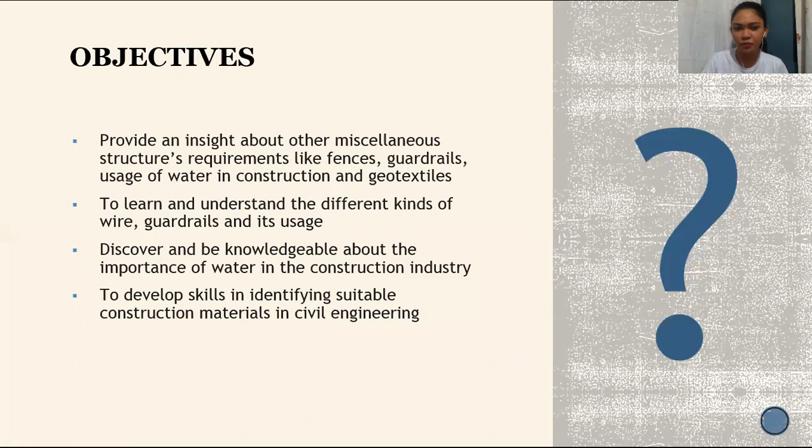Objectives: to provide an insight about other miscellaneous structures requirements like fences, guardrails, usage of water in construction, and geotextiles; to learn and understand the different kinds of guardrails and its usage; to discover and be knowledgeable about the construction and the importance of water; and to develop skills in identifying suitable construction materials in engineering.

So let's start with item 711, the fence and guardrail. By definition, a fence is a structure that encloses an area, typically outdoors, and is usually constructed from posts connected by boards, wire, rails, or netting. On the other hand, a guardrail is a railing guarding against danger, especially a barrier placed at the edge of a highway at a dangerous point. So it is usually seen on highways or roads.

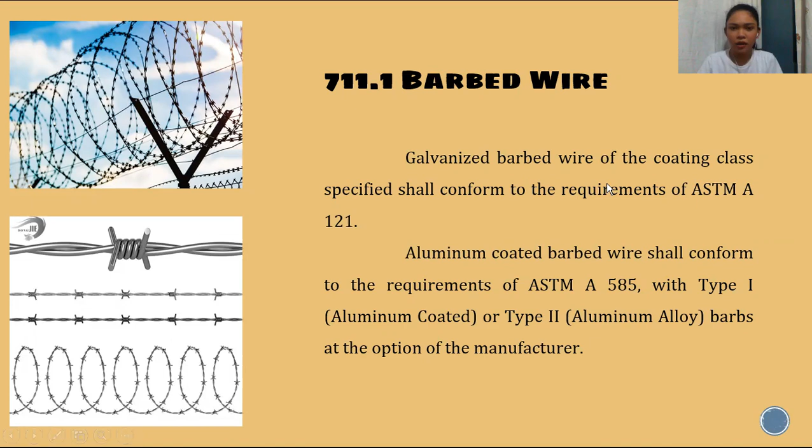Item 711.1, the barbed wire. Galvanized barbed wire of the coating class specified shall conform to the requirements of ASTM-A 121. Aluminum-coated barbed wire shall conform to the requirements of ASTM-A 585 with Type 1 aluminum-coated or Type 2 aluminum alloy barbs, at the option of the manufacturers. So under this item, it shall conform to the requirements of ASTM, the American Society for Testing and Materials. On the picture, that is an example of a barbed wire.

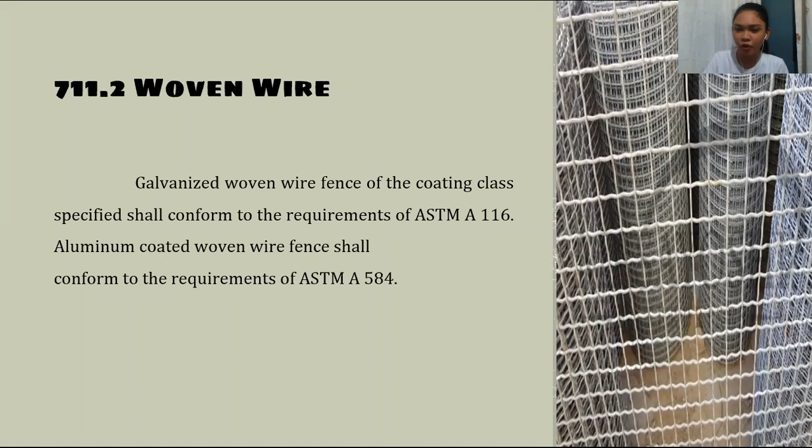Item 711.2, the woven wire. Galvanized woven wire fence of a coating class specified shall conform to the requirements of ASTM-A 116. Aluminum-coated woven wire fence shall conform to the requirements of ASTM-A 584. On the right side of the slide, that is the woven wire.

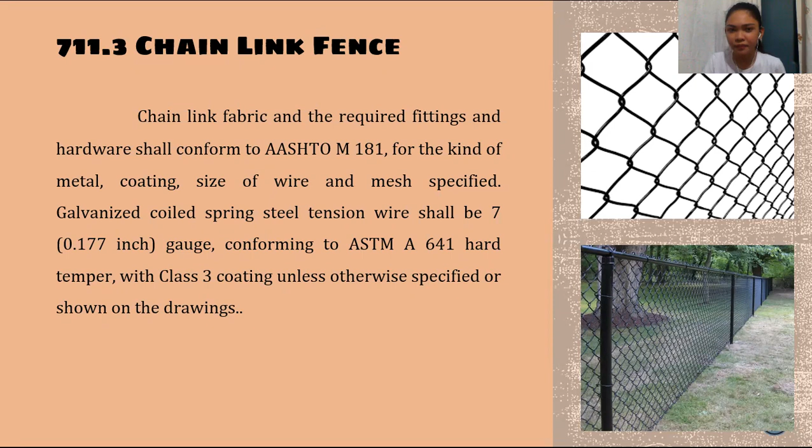Now the chain link fence. Chain link fabric and the required fittings and hardware shall conform to AASHTO M181 for the kind of metal, coating, size of wire, and mesh specified. Galvanized coil spring steel tension wire shall be 7 or 0.177-inch gauge conforming to ASTM A641 hard temper with class 3 coating unless otherwise specified or shown in the drawings. Aluminized coil spring tension wire shall also be 7 or 0.177-inch gauge hard temper having a minimum coating mass of 0.12 kg per meter squared or 0.40 ounce per foot squared of aluminum.

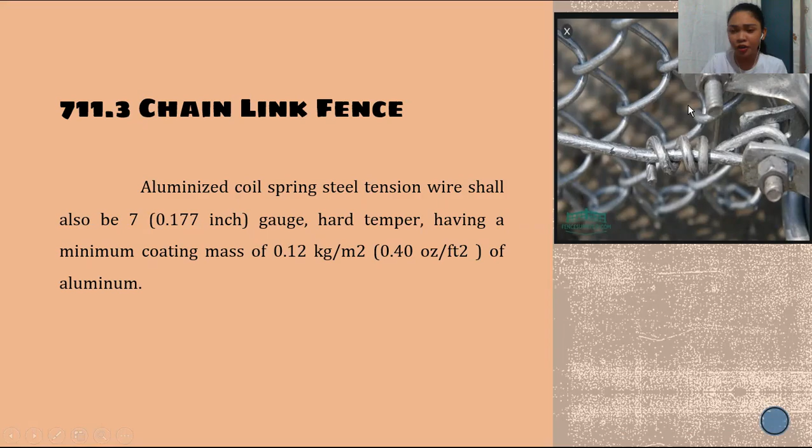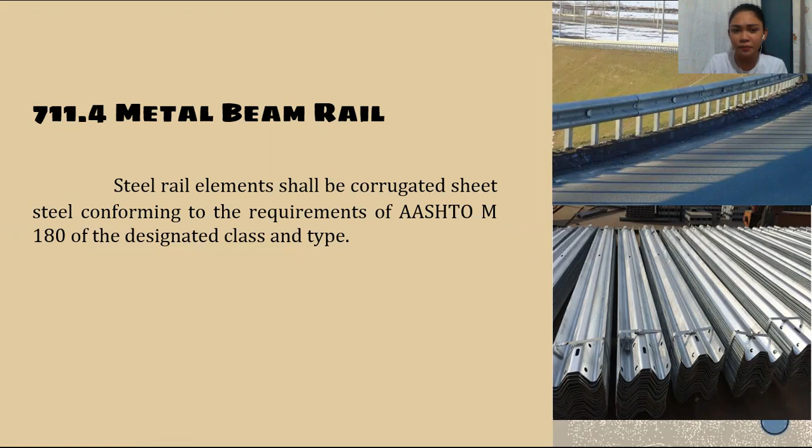So the aluminized coil spring steel tension wire, as shown in the picture, is what locks or holds the wires. Next, the metal beam rail: steel rail elements shall be corrugated steel sheet conforming to the requirements of AASHTO M 180 of the designated class and type. This metal beam rail is also shown on the slide; it is a corrugated sheet.

And the timber rails. Timber rails are rails made of timber. The timber rail shall be cut from the specified grade of dry, well-seasoned, dressed timber stock of the species specified, which shall meet the applicable requirements of AASHTO M168.

Where preservative treatment is specified, these shall conform to the requirements in Section 713.3. Rustic rails shall be straight, sound, and free of injurious defect, and shall have been cut from live trees not less than 30 days but not more than 1 year before use. They shall have been stripped of bark before seasoning or shall have been stored underwater. So the timber that would be used will be treated; treated and untreated timber will be discussed later on.

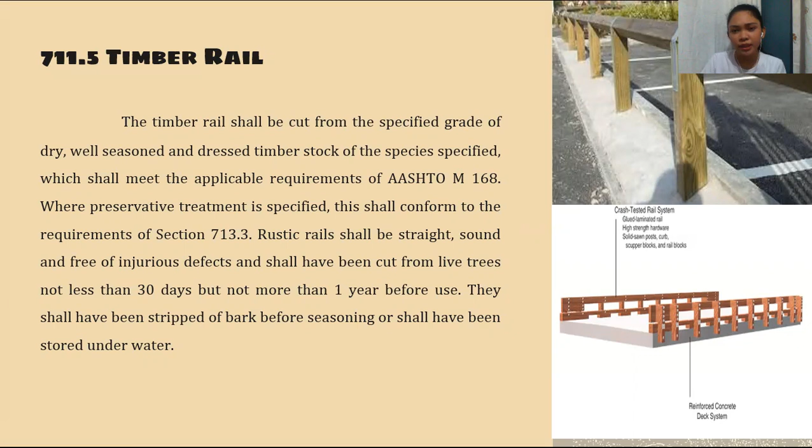Immediately before the logs are used in the work, all knots and projections shall be trimmed smooth, and if water cured, all bark shall be peeled. Slight curvature of wind to give a pleasing appearance to the structure will be permitted. Logs of only one species shall be used in the construction of any one continuous length of guardrail, meaning only one kind of timber is used in one continuous guardrail. In the picture, there's an example of a guardrail on a concrete post or concrete blocks.

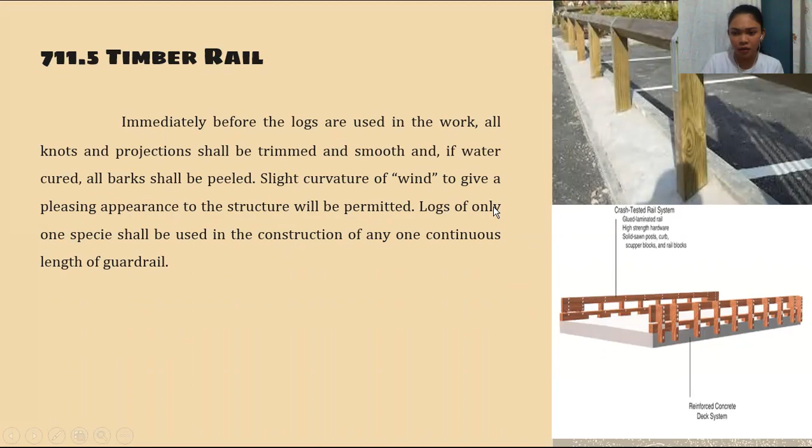Now the fence post. Wood posts shall conform to the details and dimensions indicated in the plans. All wood posts shall be sound, seasoned wood, peeled, and cut square as indicated. The posts shall be straight and all knots trimmed flush with the surface where treated posts are called for. The kind and type of treatment shall conform to that indicated in the plans. When red cedar posts or bracing is furnished, the requirements for peeling may be omitted.

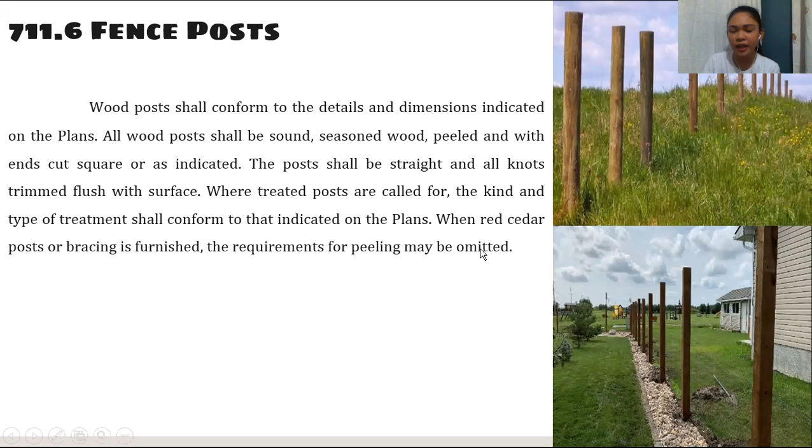There are many kinds of posts, the circular ones and the rectangular ones, so whatever is specified in your plan, that is what should be followed. It should be treated and fully furnished. All dimensions, timber, and lumber required for fences or gates shall be sound, straight, and reasonably free from knots, splits, and shakes.

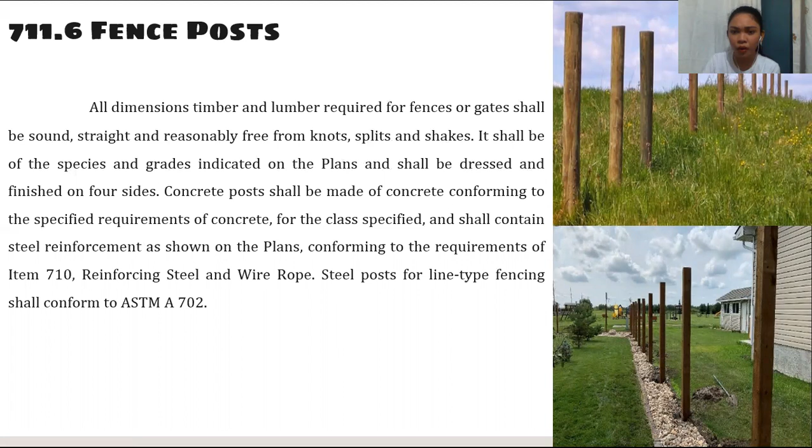It shall be of the species and grades indicated in the plans, and shall be dressed and finished on four sides. Concrete posts shall be made of concrete conforming to the specified requirements for the class specified, and shall contain steel reinforcement as shown in the plans, conforming to item 710, reinforcing steel and wire rope. Steel posts for line-type fencing shall conform to ASTM A702. Concrete posts are also commonly used nowadays because they are much more durable and can withstand any weather, and shall be according to the plans of the engineers.

Steel posts shall be galvanized in accordance with AASHTO M111, except tubular steel posts which shall be galvanized in accordance with ASTM A120. Fittings, hardware, and other appurtenances not specifically covered by the plans and specifications shall be galvanized in accordance with ASTM A120 and shall be standard commercial grade in accordance with current standard practice. Weathering steel posts conforming to the requirements of ASTM A558 shall be furnished when specified. Aluminum alloy posts shall conform to the requirements of AASHTO M181.

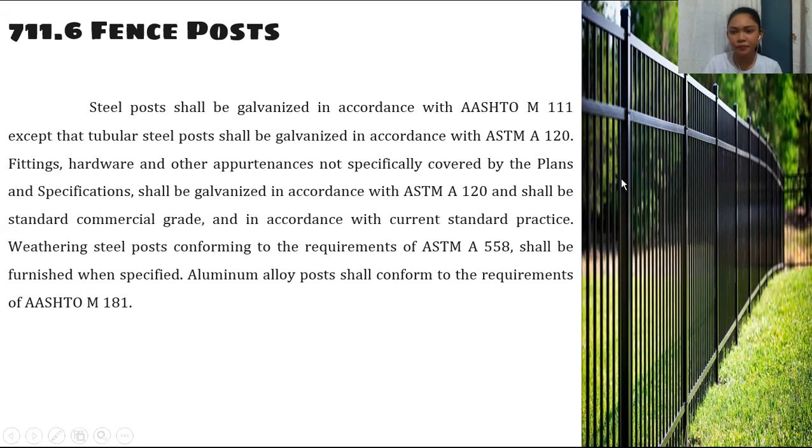Then the guardrail posts - these are the ones used to hang the guardrails, as shown on the right side of the slide. Guardrail posts shall conform to the applicable standards contained in AASHTO, AGC, ARTBA, or a Guide to Standardized Highway Barrier Rail Hardware. There are different kinds of guardrail posts, depending on what is specified in the plan - it can either be timber or steel.

Then the guardrail hardware. Guardrail hardware shall conform to the applicable standards contained in AASHTO, AGC, ARTBA, or the Guide to Standardized Highway Barrier Rail Hardware. So the hardware refers to items like the screws used to attach the guardrail post to the guardrail itself.

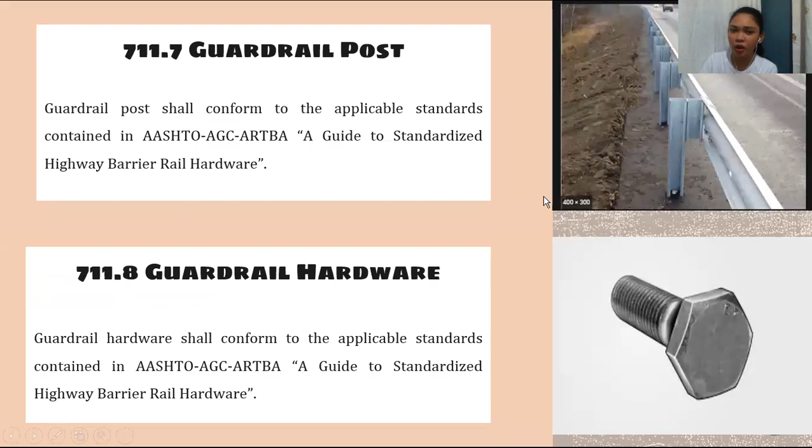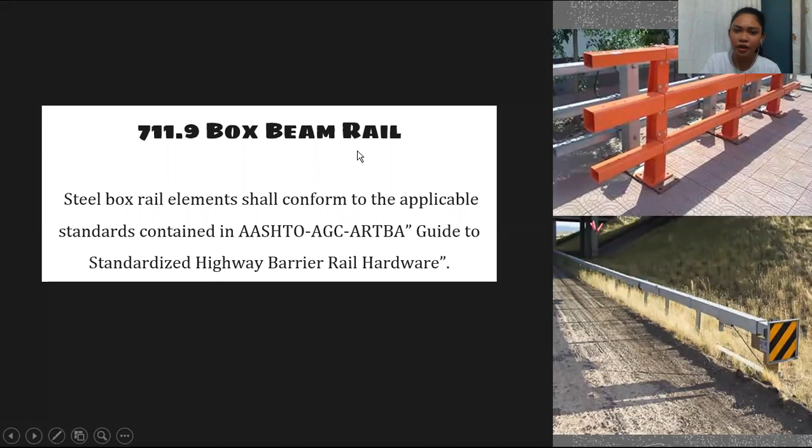Then item 711.9, the box beam rail. There is also a box beam rail that is used, different from the usual one seen in past slides which was just flat. This one is boxed. Steel box rail elements shall conform to the applicable standards contained in AASHTO, AGC, ARTBA, or the Guide to Standardized Highway Barrier Rail Hardware.

Next is item 712, structural metal. Structural steel is very common in the construction industry nowadays because of its advantages in construction. Steel shall be furnished according to the following specifications unless otherwise specified. Structural carbon rivet steel shall be furnished - all structural steel used must be furnished according to what is specified in the plan by the engineer.

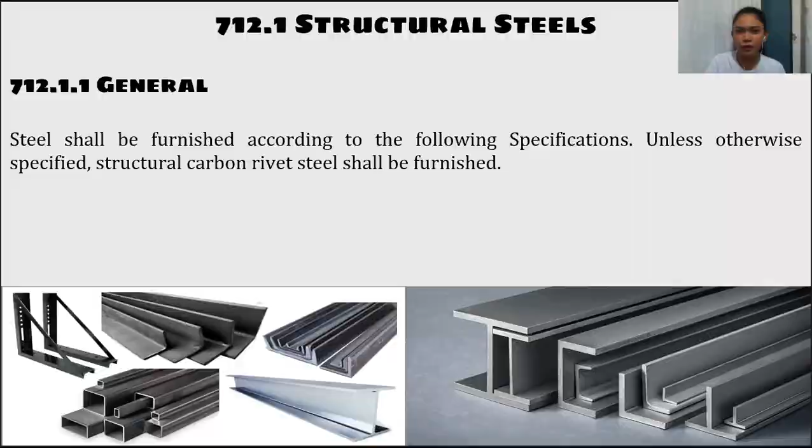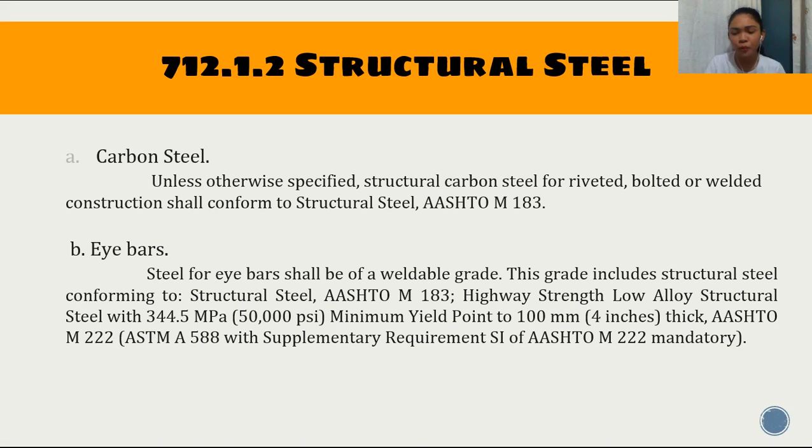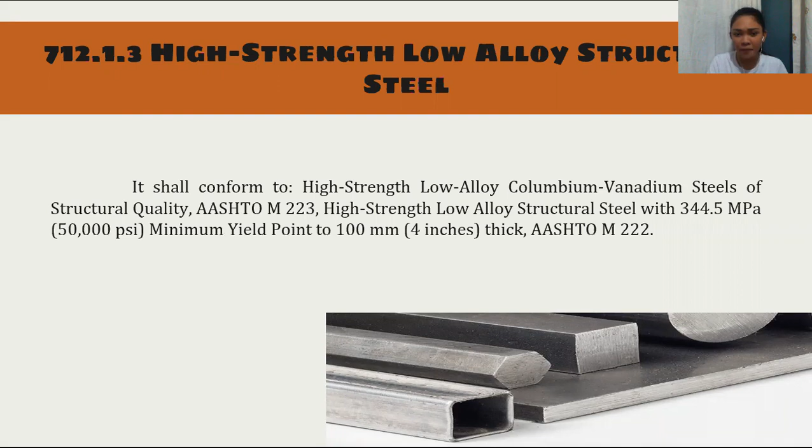Item 712.1.3, high-strength low-alloy structural steel. It shall conform to high-strength low-alloy columbium vanadium steels of structural quality, AASHTO M223, high-strength low-alloy structural steel with 344.5 MPa or 50,000 psi minimum yield point up to 100 mm or 4 inches thick, and AASHTO M222.

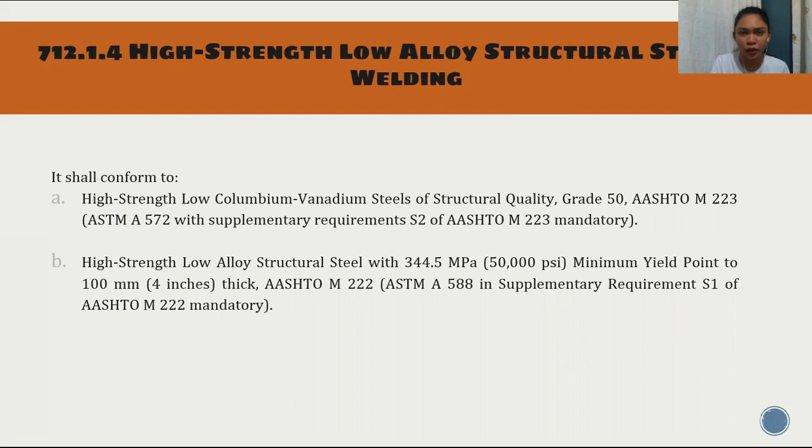Next is high-strength low-alloy structural steel for welding. It shall also conform to high-strength low-columbium vanadium steels of structural grade 50, AASHTO M223, and high-strength low-alloy structural steel with 344.5 MPa minimum yield point up to 100 mm thick, AASHTO M222, which is mandatory.

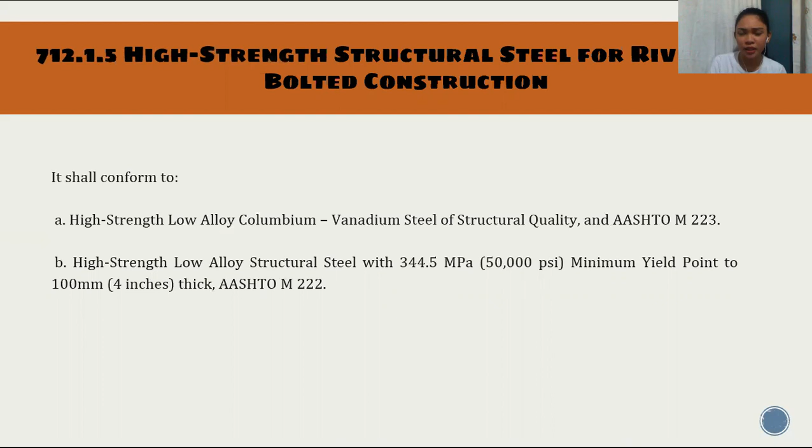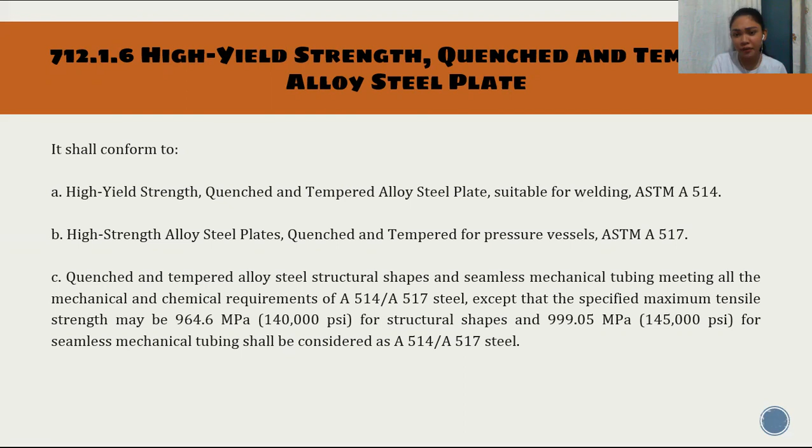Then high-yield strength quenched and tempered alloy steel plate. It shall conform to high-yield strength quenched and tempered alloy steel plate suitable for welding, high-strength alloy steel plates quenched and tempered for pressure vessels, and quenched and tempered alloy steel structural shapes and mechanical tubing meeting all mechanical and chemical requirements of A514/A517 steel, except that the specified maximum tensile strength will be 964.6 MPa for structural shapes and 999.05 MPa for seamless mechanical tubing.

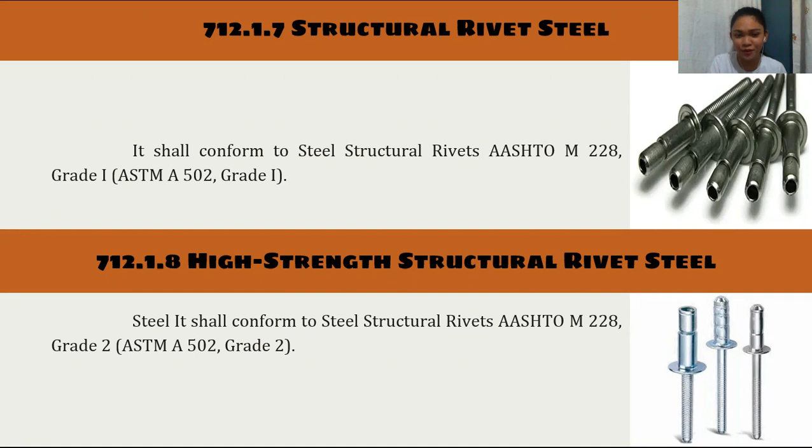Then structural rivet steel, as shown in the picture, shall conform to steel structural rivets AASHTO M228 and grade 1, ASTM A502 grade 1. High-strength structural rivet steel shall conform to steel structural rivets AASHTO M228 and grade 2.

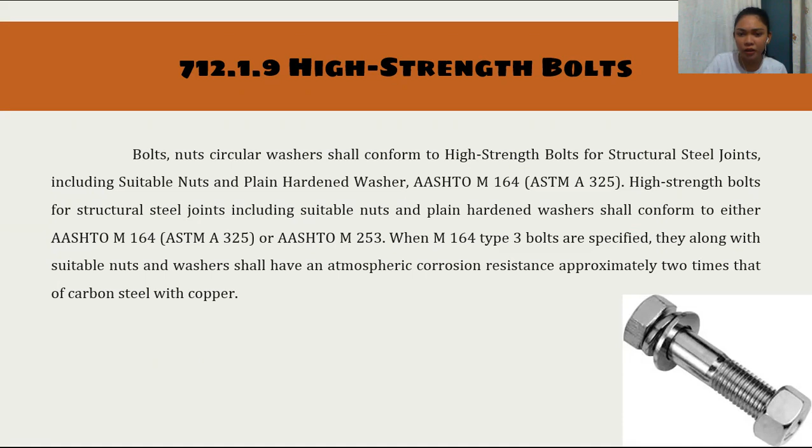AASHTO M164 high-strength bolts for structural steel joints, including suitable nuts and plain hardened washers, shall conform to either AASHTO M164 or AASHTO M253. When M164 Type 3 bolts are specified, they, along with suitable nuts and washers, shall have an atmospheric corrosion resistance approximately 2 times that of carbon steel with copper.

Bolts and nuts manufactured to AASHTO M164 are identified by proper marking as specified on the top of the bolt heads and on the face of the nuts for 3 different types. Bolts manufactured to AASHTO M253 shall be identified by marking on the top of the head with the symbol A490, and the nut shall be marked on the face with the legend 2H or DH.

Bolt and nut dimensions shall conform to the dimensions shown in the table, as I will show later, and to the requirements for heavy hexagon structural bolts and for heavy semi-finished hexagon nuts given in ANSI standard B18.2.1 and B18.2.2 respectively. So these are the specifications here.

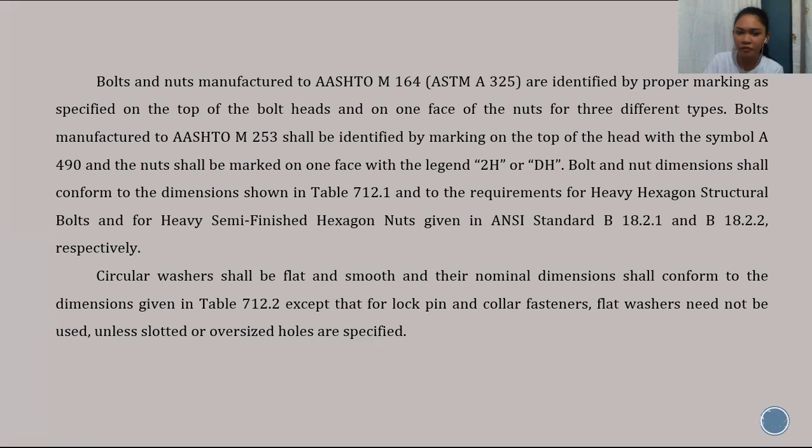The circular washers shall be flat and smooth, and their nominal dimension shall conform to the dimensions given in Table 712.2, except that for lock pin and collar fasteners, flat washers need not be used unless slotted or oversized holes are specified. Beveled washers for American Standard beams and channels or other sloping faces shall be required and shall be square or rectangular in shape.

They shall be tapered in thickness and shall conform to the dimensions given in the table. When necessary, the washer may be clipped on one side to a point not closer than 0.875 or 7/8 of the bolt diameter from the center of the washer.

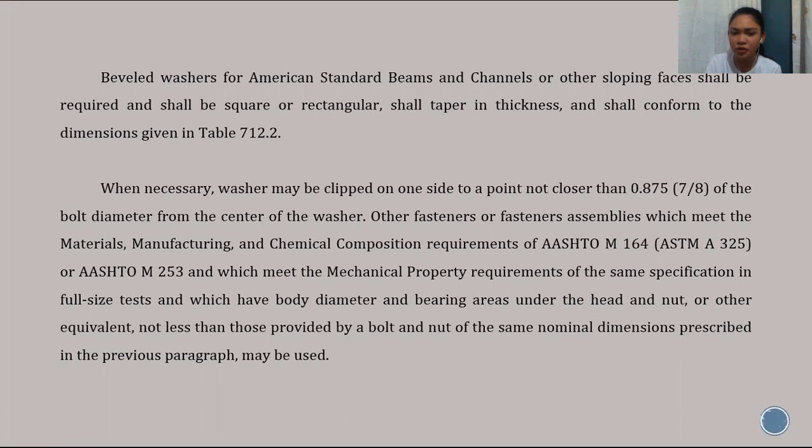Other fastener assemblies which meet the manufacturing materials and chemical composition requirements of AASHTO M164 or M253, and which meet the mechanical property requirements of the same specifications in full-size tests, which have body diameter and bearing areas under the head and nut or other equivalent not less than those provided by a bolt and nut of the same nominal dimensions prescribed in the previous paragraph, may be used.

Subject to the approval of the engineer, high-strength steel lock pin and collar fasteners may be used as an alternate for high-strength bolts or rivets as shown in the plans.

The shank and head of the high-strength steel lock pin and collar fasteners shall meet the requirements of the preceding paragraph. Each fastener shall provide a solid shank body of sufficient diameter to provide tensile and shear strength equivalent to or greater than the bolt or rivet specified, and shall have a cold forged head on one end, of type and dimensions as approved by the engineer.

A shank length suitable for material thickness, fastening locking groove, breakneck groove, and pull grooves are all annular grooves on the opposite end. So as specified on the plans, you follow and base it on AASHTO M253 or AASHTO M164.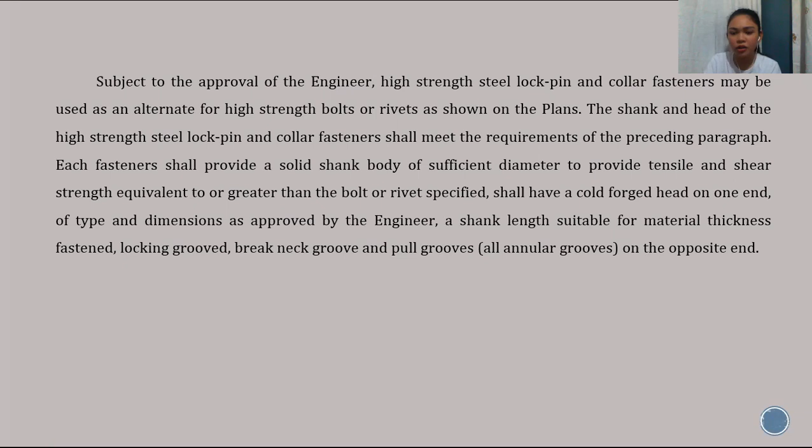Lastly, each fastener shall provide a steel locking collar of proper size for the shank diameter used, which by means of suitable installation tools is cold swaged into the locking grooves, forming a head for the groove end of the fastener after the pulling groove section has been removed.

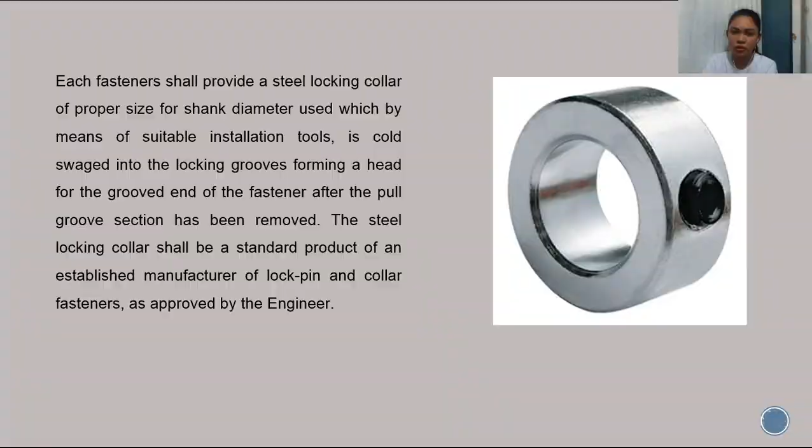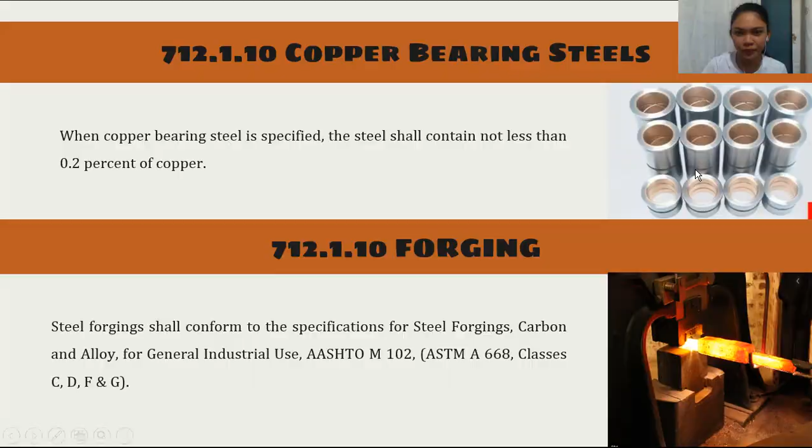Item 712.3, pins and rollers. Pins and rollers more than 228.6 mm or 9 inches in diameter shall be annealed carbon steel forgings conforming to AASHTO M102 Class C1.

Pins and rollers 228.6 mm or 9 inches or less in diameter shall be annealed carbon steel forgings conforming to AASHTO M102 Class C1, or cold finished carbon steel shafting conforming to AASHTO M169, grade 1016 to 1030 inclusive, with a minimum Rockwell scale B hardness of 85.

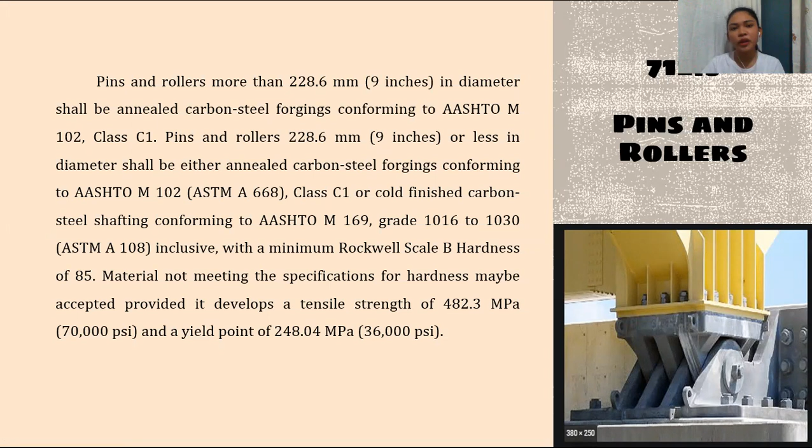Material not meeting the specification for hardness may be accepted provided it develops a tensile strength of 482.3 MPa or 70,000 psi and a yield point of 248.04 MPa. So material that doesn't pass the hardness specification stated in AASHTO M169 may be accepted provided its tensile strength reaches 70,000 psi and its yield point reaches 36,000 psi.

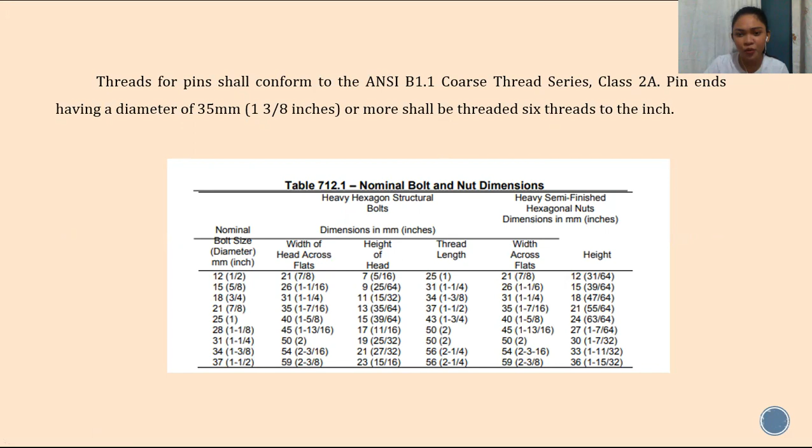This is Table 712.1 for nominal bolt and nut dimensions, which I already discussed or rather read earlier. The bolt size is specified in mm or inches, along with the width across flats, the height of the head, the thread length, and the width across flats or height.

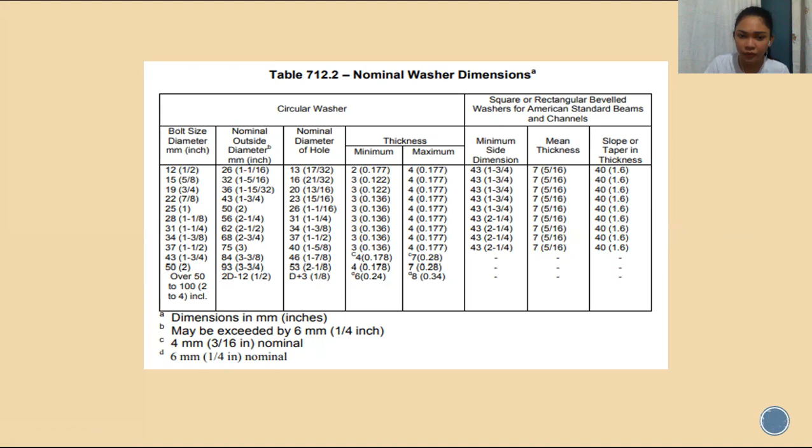The casting shall conform to the requirements of the following specifications: steel castings for highway bridges, AASHTO M192 Class 70, shall be furnished unless otherwise specified, and chromium alloy steel casting, AASHTO M163 grade CA15, shall be furnished unless otherwise specified. This is specified in the plans, so you just follow the plans.

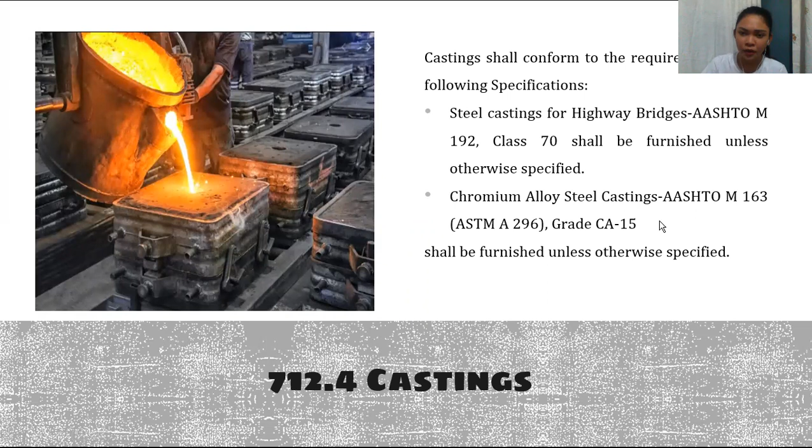Then gray iron casting, AASHTO M105 class number 30, shall be furnished unless otherwise specified. Iron castings shall be true to pattern in form and dimensions, free from pouring faults, sponginess, cracks, blow holes, and other defects affecting strength and value for the service intended. Castings shall be boldly filleted at angles and the arrises shall be sharp and perfect. So your casting should follow the dimensions, be free from folds, sponginess, cracks, holes, or other defects.

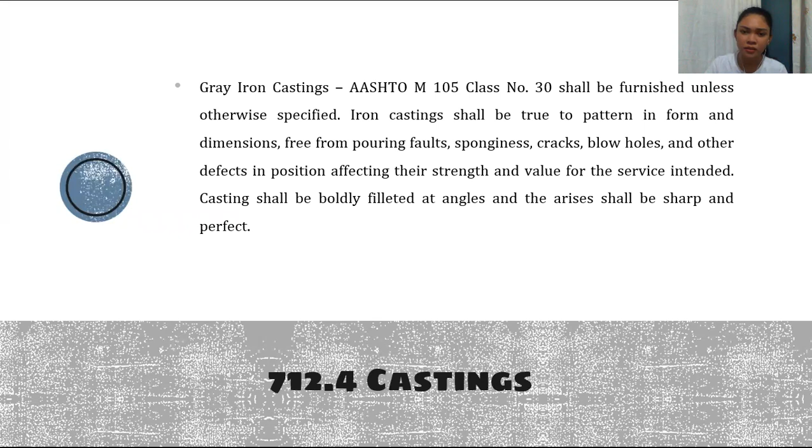For item 712.5, steel grid floors. Here's an example of steel grid floors. All steel grid floors shall conform to the requirements of AASHTO M183 or AASHTO M222. Steel grid floors can be weathering steel, galvanized, or painted. Unless the floors are weathering steel or galvanized, the material shall have a minimum copper content of 0.2% unless painting of floors is specified in the special provisions.

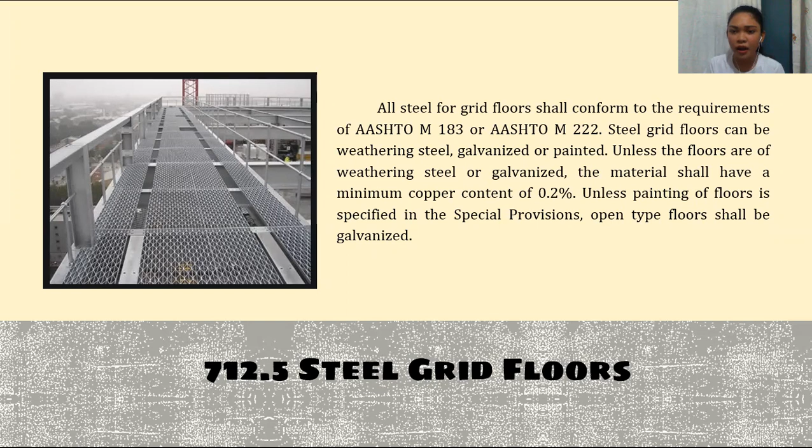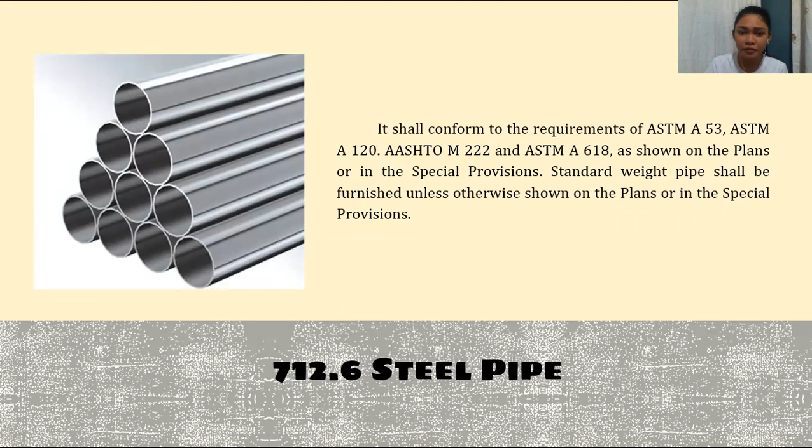Item 712.6, steel pipe, which shall conform to the requirements of ASTM A53, ASTM A120, AASHTO M222, and ASTM A618 as shown in the plans or special provisions. Standard weight pipe shall be furnished unless otherwise shown in the plans or special provisions.

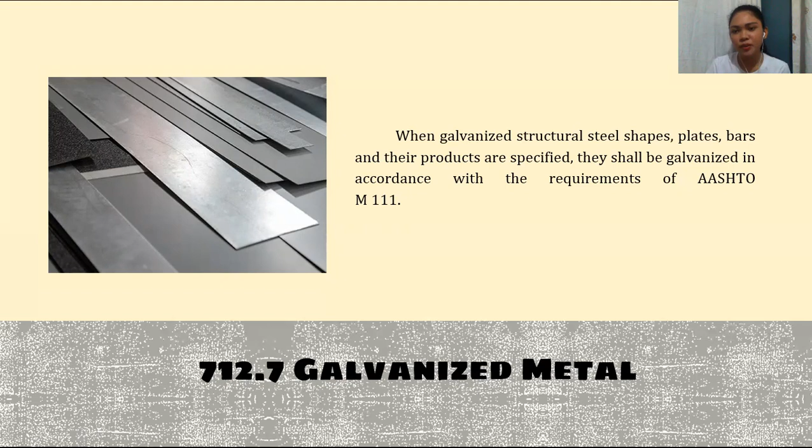712.7, galvanized metal. When galvanized structural steel shapes, plates, bars, and their products are specified, they shall be galvanized in accordance with the requirements of AASHTO M111. Next is sheet lead.

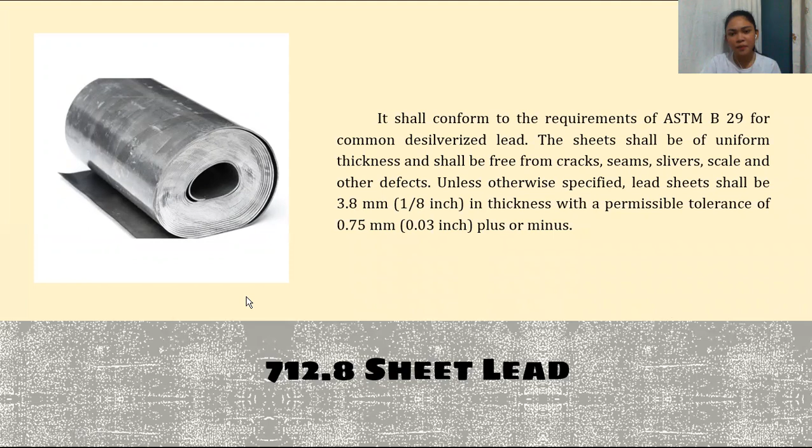This is sheet lead. It shall conform to the requirements of ASTM B29 for common desilverized lead. The sheets shall be of uniform thickness and free from cracks, seams, slivers, scale, and other defects. Unless otherwise specified, lead sheets shall be 3.8mm in thickness with a permissible tolerance of 0.75mm plus or minus. The next is welded stud shear connectors.

This is welded stud shear connectors. It shall conform to the requirements of AASHTO M169 for cold finish carbon steel bars and shafting, cold drawn bar, grades 1015, 1018, or 1020, either semi-skilled or fully skilled. If flux retaining caps are used, the steel for the caps shall be of low carbon grade suitable for welding and should comply with ASTM A109 for cold rolled carbon steel strip.

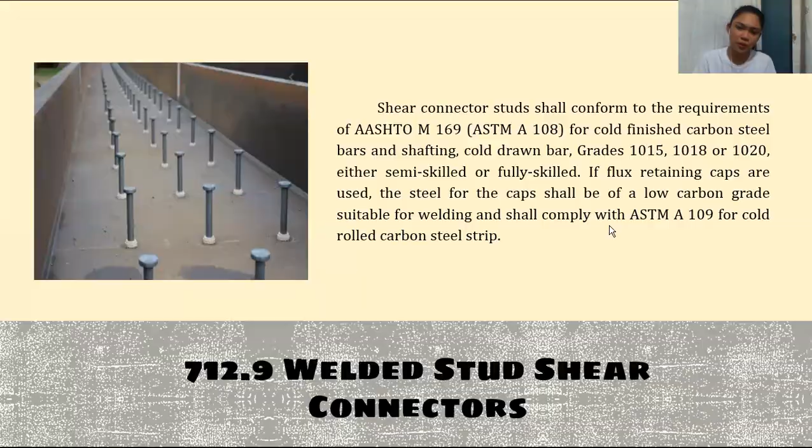The tensile properties as determined by test of bar stock, after drawing, a finished stud should conform to the following requirements. The tensile strength minimum should be 413.4 MPa or 60,000 PSI. The yield strength minimum is 345 MPa or 50,000 PSI, or as determined by the 0.2% offset method. The elongation must be minimum 20% in 50mm or 2 inches, and the reduction in area must be minimum 50%.

The tensile properties shall be determined in accordance with applicable sections of ASTM A370 for mechanical testing of steel products. If fracture occurs outside the middle half the gauge length, the test shall be repeated. Finished studs shall be of uniform quality and condition, free from injurious laps, fins, seams, cracks, twists, bends, or other defects, and the finish shall be produced by cold drawing, cold rolling, or machining.

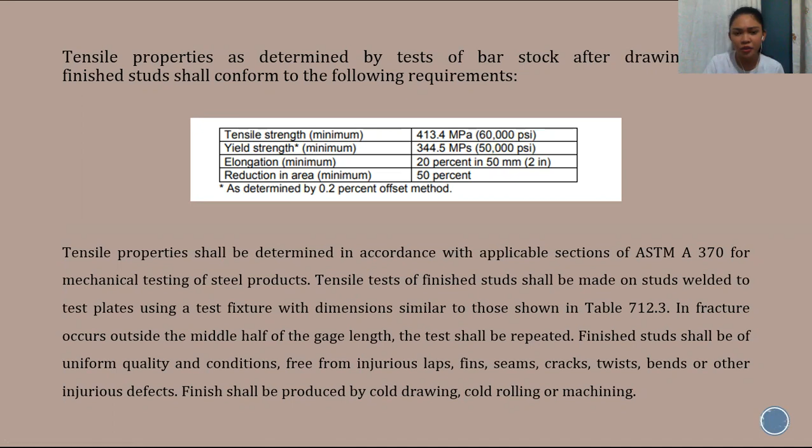So under your tensile test, if it breaks or fractures outside the middle half, you need to repeat the test. The stud shall conform to the dimensions given in the table below. The contractor shall furnish the manufacturer's certification that the studs as delivered are in accordance with the material requirements of this item. Certified copies of in-plant quality control test reports shall be furnished to the engineer upon request.

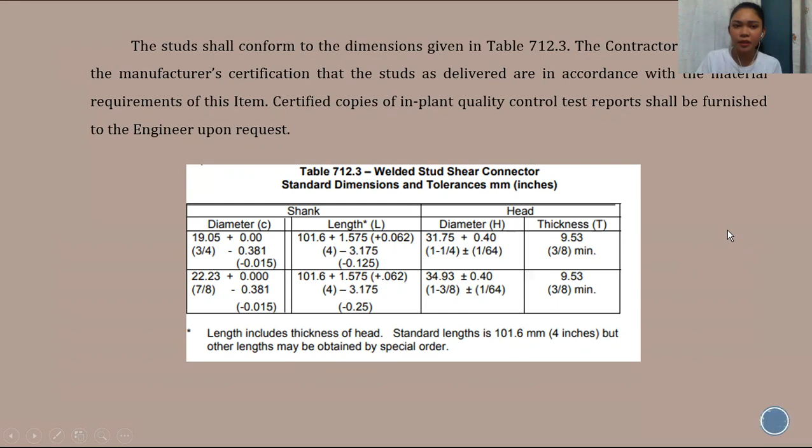If naka-shank siya, if iyang shank o head, ang diameter naka-specified, iyang length, and then sa head naka-specify ang diameter, iyang thickness. So the length includes thickness of head. Standard length is 101.6 mm or 4 inches, but other lengths may be obtained by special orders. So mao na isa ka advantages sa steel, if ganito, pwede nimo siya i-specify ang imuhang order. Special order ka.

So next is item 713, the treated and untreated timber. Familiar man ta sa treated o untreated timber, no? So untreated timber mao na siya katong closest nga makuha gikan sa natural wood. Pag cut nimo sa wood, so kung unsa to iyahang structure, kung unsa to iyahang properties, mao na jud to.

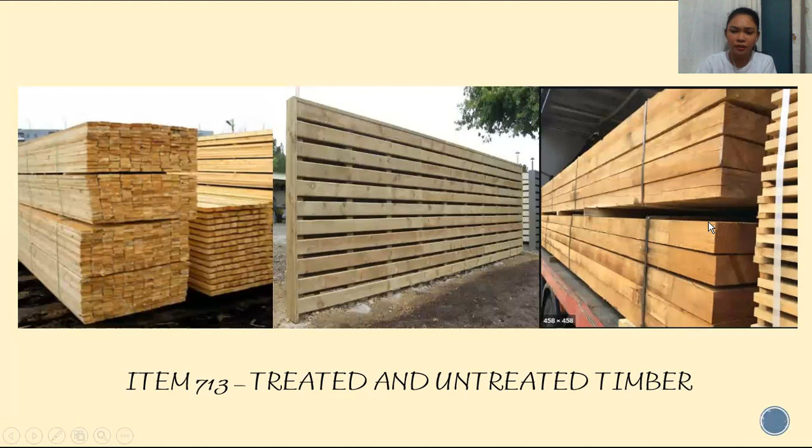Well, the treated timber are infused with chemicals to resist deterioration due to the weather and the insects. So in the picture, the right side is the untreated timber - as you can see, kung anong siya kaayo gaspang, tapos medyo bag-o pa nga pag-cut sa wood or sa timber. While on the left side is an example of treated timber. So ang ilang kalahian kay depende lang dyan sa iyang durability. Usahay ang treated timber kay mas durable siya kay gibutangan naman siya chemicals para maka-withstand sa weather and sa mga insects. So ang untreated timber, as-is lang din siya.

So the general requirements: it shall be of the species specified in the plans unless otherwise noted in the plans or in the special provisions, only the best grade shall be used. Naka-specified sa plan ang inyong - it shall be free from loose knots, splits, worn holes, decay, warp, ring separation, or any defects which will impair its strength or render it unfit for its intended use. So dapat imong piliun nga mga timber, katong walay defect, kay para dili siya maka-apekto sa imuhang project o sa imuhang paggamit niya.

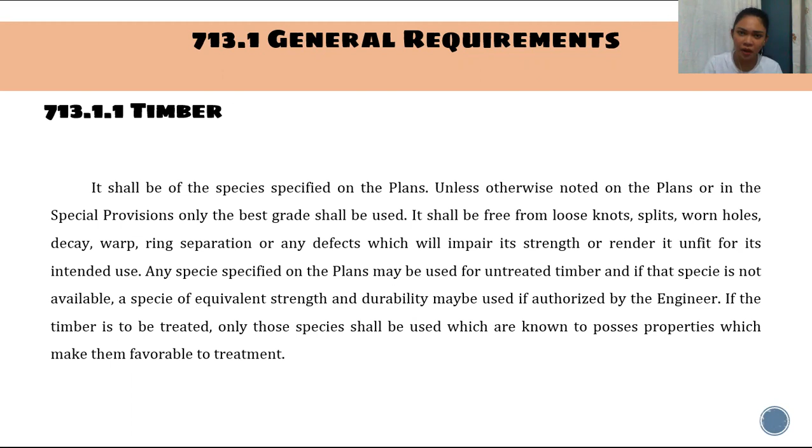Sa item 713.1.2, the paints. When painting of timber is required, the paint shall conform to the requirements of item 709, paints. So na-discuss naman niyo sa past reporter about paint, so dili na namo siya i-discuss.

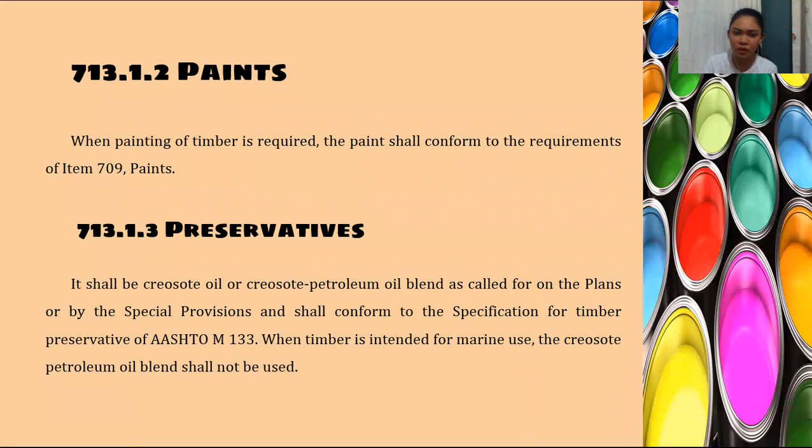Sa item 713.1.3, preservatives. It shall be creosote oil or creosote petroleum oil blend as called for in the plans or by the special provisions, and shall conform to the specifications for timber preservative of AASHTO M133. When timber is intended for marine use, the creosote petroleum oil blend shall not be used.

Then for the untreated structural timber and lumber: structural timber, lumber, and piling shall conform to the applicable requirements of AASHTO M168 or equivalent. No boxed heart pieces of Douglas fir or redwood shall be used in outside stringers, floor beams, caps, posts, sills, or rail posts. Box heart pieces are defined as timbers sawed at any point in the length of a sawed piece, the pith lies entirely inside the four faces. Yard lumber shall be of the kinds and grade called for in the plans, and the round pole and post shall be of the kinds indicated in the plans.

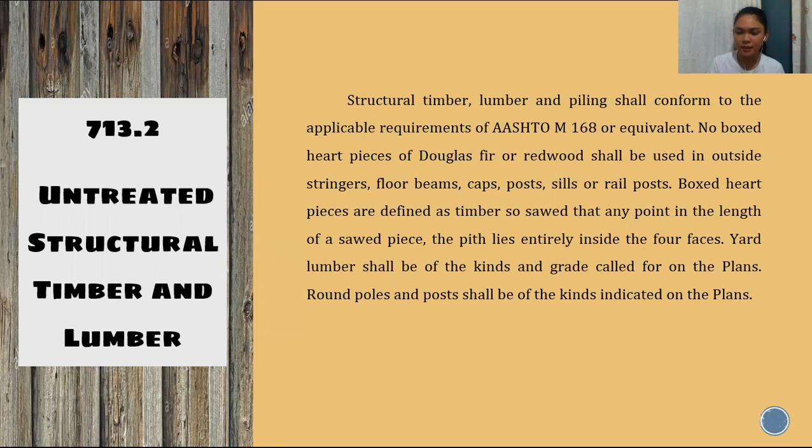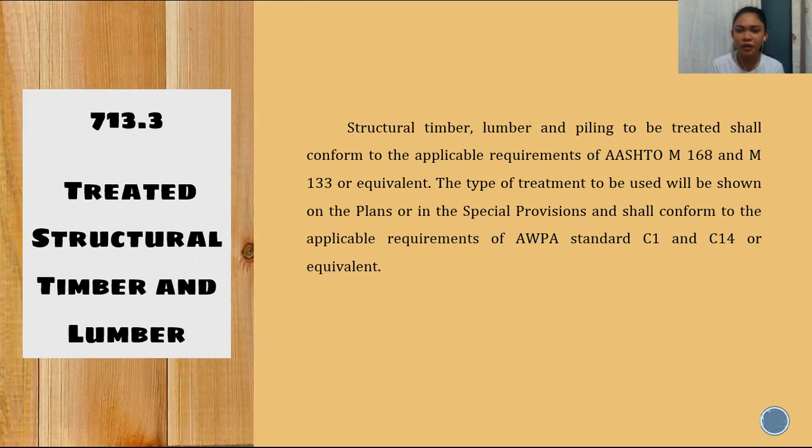For the treated timber, structural timber, lumber and piling to be treated shall conform to the applicable requirements of AASHTO M168 and M133 or equivalent. The type of treatment to be used will be shown in the plans or in the special provisions, and shall conform to the applicable requirements of AWPA Standard C1 and C14 or equivalent.

Then we go to item 714, water. The description: this item covers criteria for acceptance of questionable water, either natural or wash water, for use in concrete. So ang water nga gina-use sa ato nga concrete mix kay naka-specified dito sa atong DPWH Bluebook under item 714.

714.1, the requirements. The mixing water shall be clear and apparently clean. If it contains quantities or substances that discolor it or make it smell or taste unusual or objectionable or cause suspicion, it shall not be used unless service records of concrete made with it indicate that it is not injurious to the quality, and shall be subject to the acceptance criteria as shown in the table or as designated by the purchaser. So bisag i-mix gihapon nimo sa concrete, dapat wala gihapon siya mga quantities o substances nga makahimo siyang lubog, or naa siyay baho, o makacause siya ug suspicion sa water, kay either mag-affect na siya sa imuhang structure.

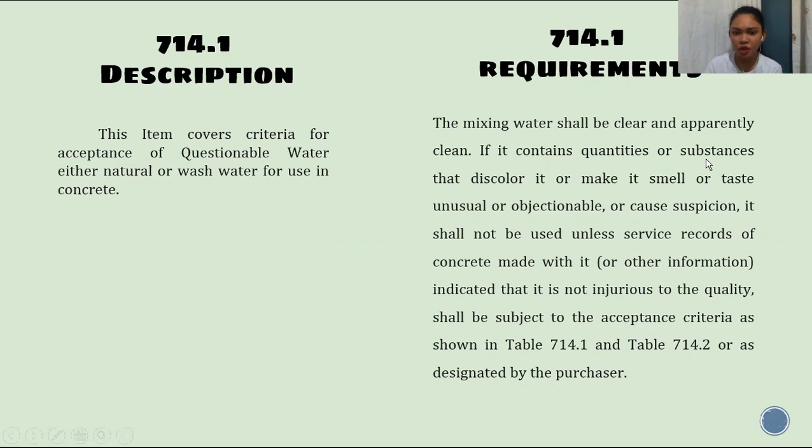When wash water is permitted, the producer will provide satisfactory proof or data of non-detrimental effects of potentially reactive aggregates to be used. Use of wash water will be discontinued if undesirable reactions with admixtures or aggregates occur. When wash water reused as mixing water in concrete may exceed the listed concentrations of sulfate if it can be shown that the concentration calculated in the total mixing water, including the mixing water and the aggregate and other sources, does not exceed the stated limit.

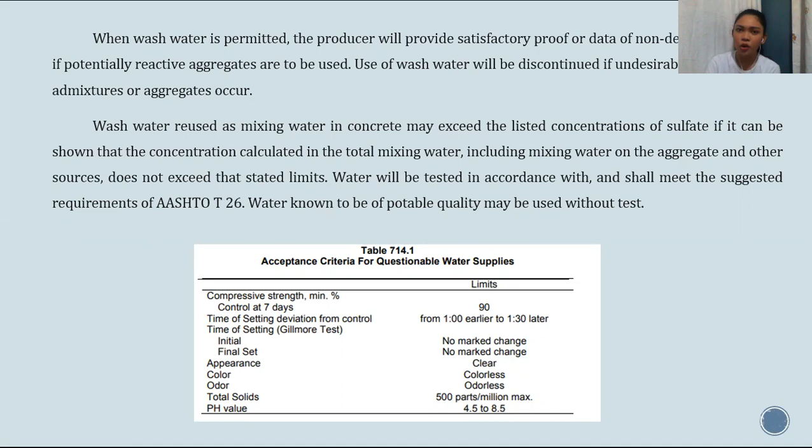Lastly, Item 715, which is geotextiles. Geotextiles are permeable fabrics when used in association with soil that have the ability to separate, filter, reinforce, protect, or drain. It's usually used to increase soil stability, provide erosion control, and aid in drainage. Simply put, geotextile is a fabric placed in the ground which helps with erosion, soil stability, or aids in drainage.

The description: this item covers geotextile fabrics for use in subsurface drainage, hydraulic filter, erosion control, sediment control, pavement structures as a waterproofing and stress relieving membrane, and as a permeable separator to prevent mixing of dissimilar materials such as foundation and select fill materials. As I said, for sediment control and pavement structures, it can become a filter to select or filter the materials you mix in.

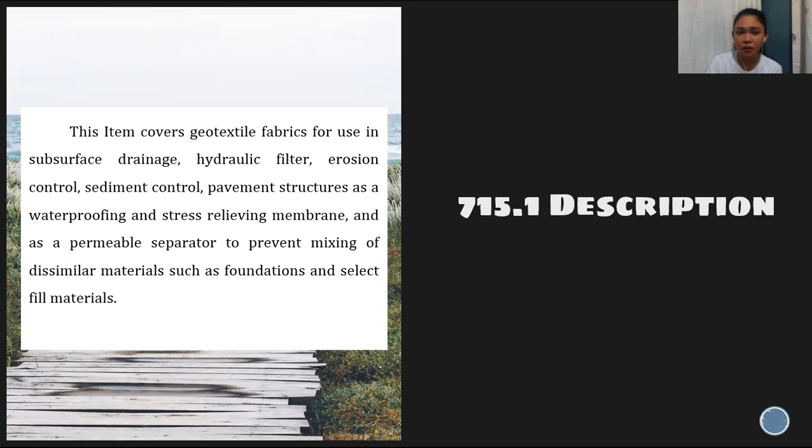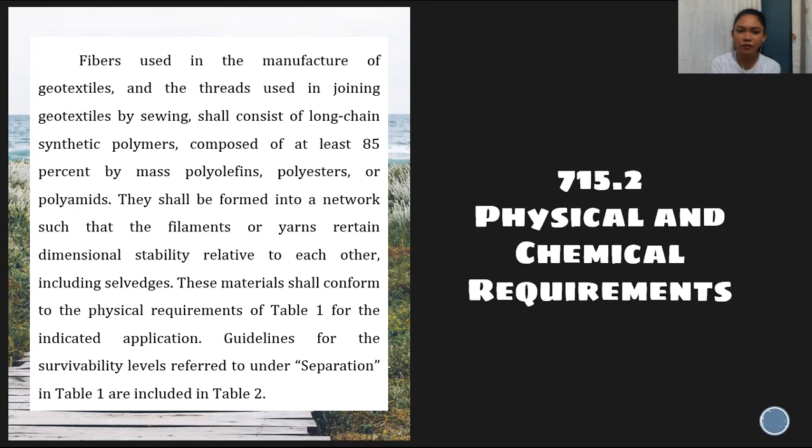So there are physical and chemical requirements. The fibers and threads used in joining geotextiles by sewing shall consist of long-chain synthetic polymers composed of at least 85% by mass of polyolefins, polyesters, or polyamides. They shall be formed into a network such that the filaments or yarns retain dimensional stability relative to each other, including selvedges. This material shall conform to the physical requirements of Table 1 for the indicated application.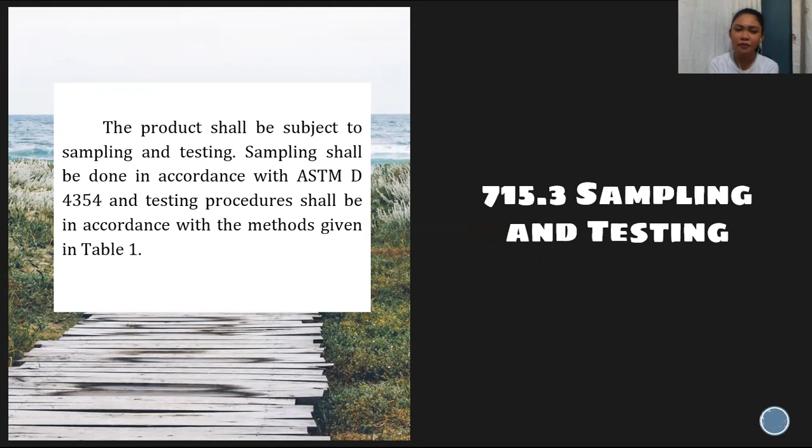Then sampling and testing. Geotextiles also undergo sampling and testing. The product shall be subjected to sampling and testing, and the sampling shall be done in accordance with ASTM D4354, and testing procedures shall be in accordance with the methods given in Table 1.

Next is the certification. After testing, it should be certified so it can be confirmed to your contractor or engineer that it is suitable to be used. The manufacturer shall file with the purchaser a certificate stating the name of the manufacturer, the chemical composition of the filaments or yarns, and other pertinent information to fully describe the geotextile. The manufacturer shall include in the certificate a guarantee stating that the geotextile furnished meets the requirements of the specifications. The certificate shall be attested to by a person having legal authority to bind the company.

So either mismarking or misrepresentation by the manufacturer shall be reason to discontinue acceptance under these specifications. Notice to the manufacturer by the purchaser regarding the discontinuance of acceptance will be considered to be notice to all wholesalers, jobbers, distributors, agents, and other intermediaries handling the manufacturer's products.

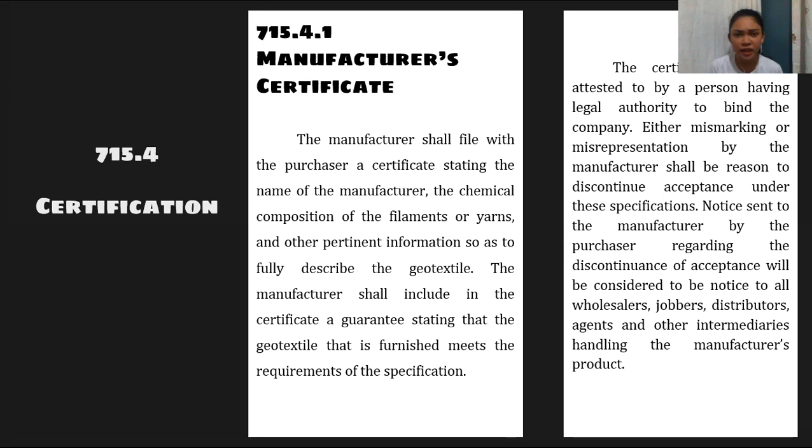So that's it - your information should be specified in the certificate. If there's misrepresentation stated there, then acceptance should be discontinued. The notice to the manufacturer by the purchaser regarding discontinuance of acceptance is meant to notify the wholesalers, distributors, and manufacturers.

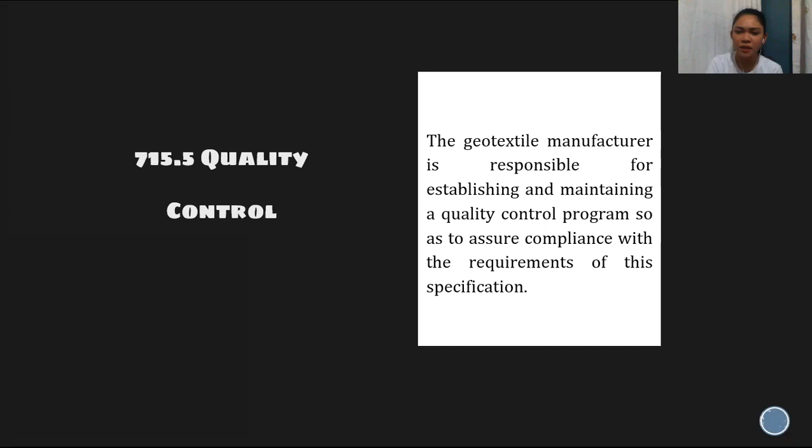And then quality control. The geotextile manufacturer is responsible for establishing and maintaining a quality control program so as to assure compliance with the requirements of the specification. And the shipment and storage...

During periods of shipment and storage, the fabric shall be protected from direct sunlight - it should not be exposed there. Also protected from ultraviolet rays, temperatures greater than 60 degrees Celsius or 140 Fahrenheit, mud, dust, and debris. To the extent possible, the fabric shall be maintained wrapped in a heavy-duty protective covering, and each shipping document shall include a notation certifying that the geotextile is in accordance with the manufacturer's certificate and guarantee previously filed with the purchaser.

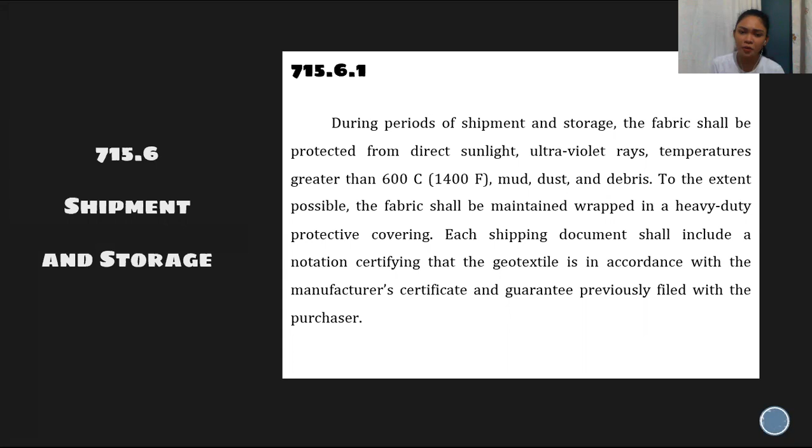Then shipping and storage - the product marking label on the fabric and its container should include the manufacturer's name, fabric type or trade name, lot number, and quantity. All of this should be indicated in your shipping document.

The product marking label includes the manufacturer's name, fabric type, trade name, lot number, and quantity.

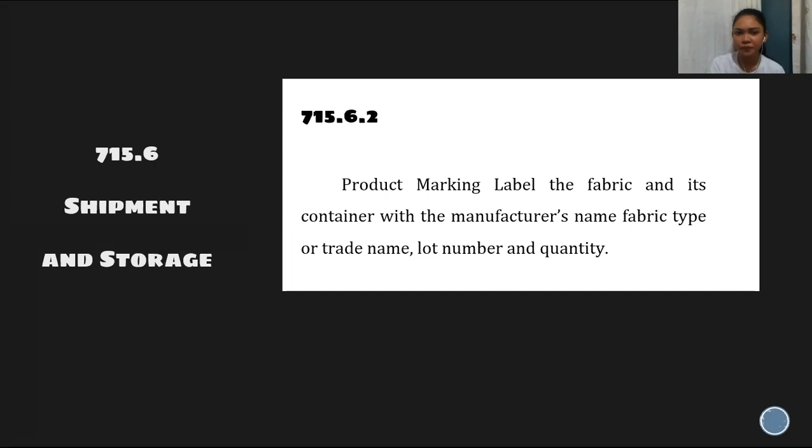For separation geotextile, the geotextile shall be unrolled as smoothly as possible on the prepared subgrade in the direction of construction traffic. Adjacent geotextile rolls shall be overlapped in the direction of subbase placement using the guidance in Table 3. Sewing is recommended where subgrade soils have a CBR value less than 1.

The geotextile may be held in place prior to subbase placement by pins, staples, or piles of fill or rock.

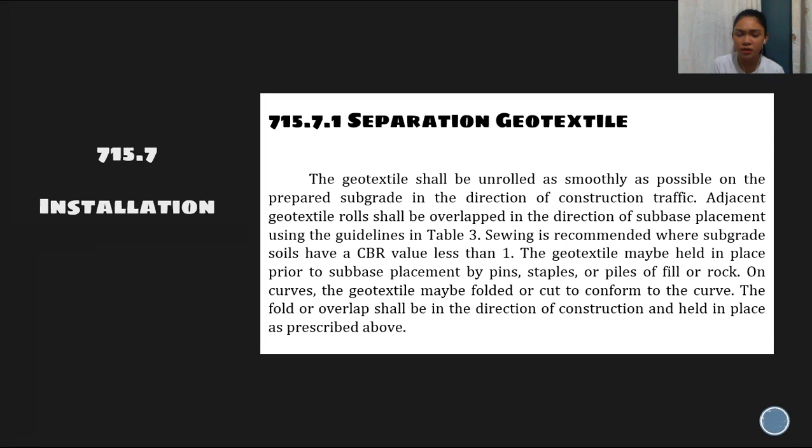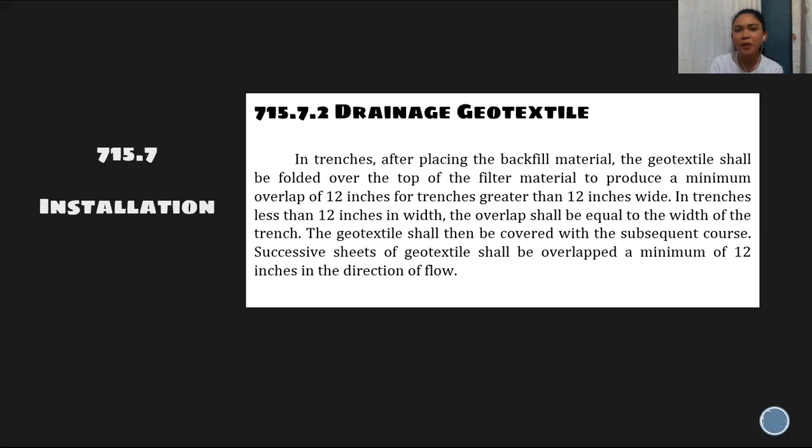For drainage geotextile, in the trenches, after placing the backfill material, the geotextile shall be folded over the top of the filter material to produce a minimum overlap of 12 inches for trenches greater than 12 inches wide. In trenches less than 12 inches in width, the overlap shall be equal to the width of the trench. The geotextile shall then be covered with the subsequent course. Successive sheets of geotextile shall be overlapped a minimum of 12 inches in the direction of flow.

For erosion control, the geotextile shall be placed and anchored on a smooth, graded surface approved by the engineer.

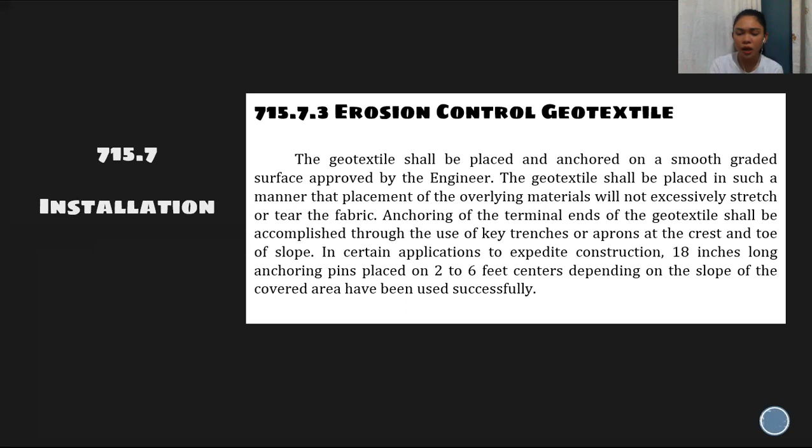For the silt fence, fence construction shall be adequate to handle stress from sediment loading.

Geotextile at the bottom of the fence shall be buried a minimum of 6 inches in a trench so that no flow can pass under the barrier.

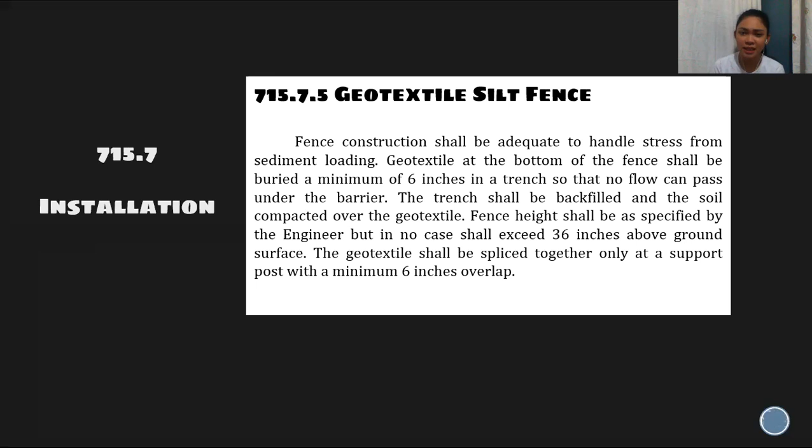For the paving fabric, the fabric shall be placed into the asphalt sealant with minimum wrinkling prior to the time the asphalt has cooled and lost tackiness. As directed by the engineer, wrinkles or folds in excess of 1 inch shall be slit and laid flat. Brooming and other pneumatic rolling will be required to maximize fabric contact with the pavement surface.

Overlap of the fabric joint shall be sufficient to ensure full closure of the joint but should not exceed 6 inches. Transverse joints shall be lapped in the direction of paving to prevent edge pick-up by the paver. A second application of asphalt sealant to fabric overlaps will be required if in the judgment of the engineer.

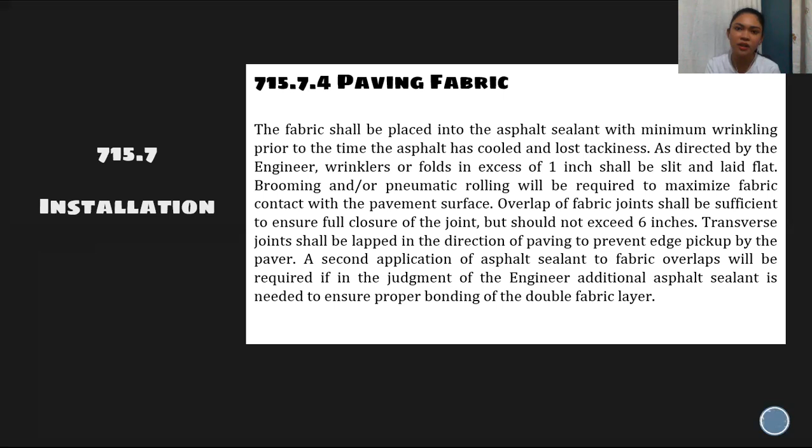For the hydraulic filter, it shall be laid lengthwise down slopes and appropriately anchored along the top edge.

The overlap shall be sufficient to prevent parting of laps during the initial construction or fill stage. Alternatively, the geotextile shall be sewn using a double-stitch portable sewing machine and appropriate thread.